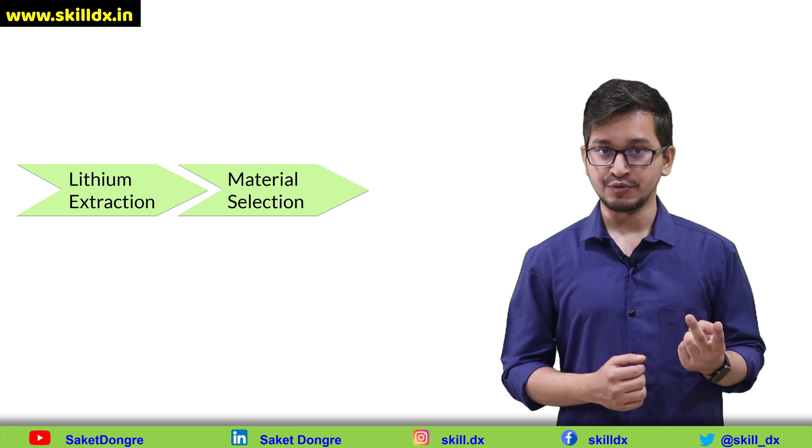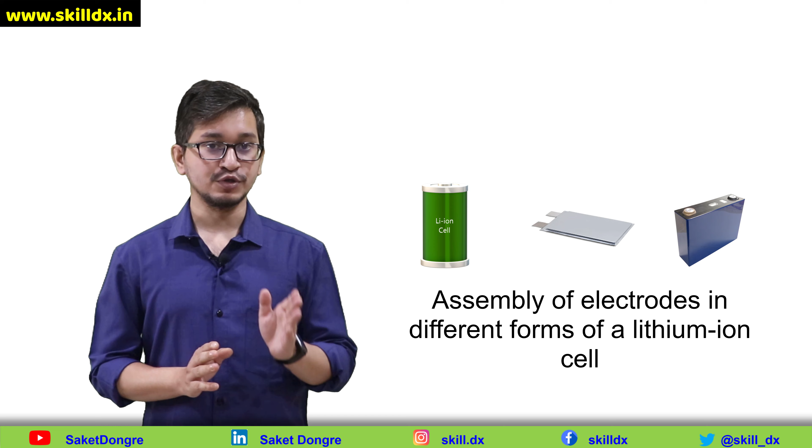Hello guys, until now in this series on lithium ion battery manufacturing, I have discussed everything step by step. It started from lithium extraction from lithium salt, then selection of materials for negative and positive electrodes, to selection of correct electrolytes and separators. Once we are done with all these, we fabricate the electrodes separately in different rooms under certain temperatures on one application machine. Now we move to the next process, which is assembly of electrodes in different forms of lithium ion cells. Let's get started.

The cell assembly process involves steps such as building the electrode sub-assembly, putting these sub-assemblies into a package, filling the cells with electrolyte, performing final operations to make sure the package is sealed, and lastly welding the container and inspecting the cells.

Some details vary depending on whether we are talking about building a prismatic, cylindrical, or pouch cell, but many details are fairly similar. This illustration shows the process as it would apply to a cylindrical cell or even to a prismatic cell.

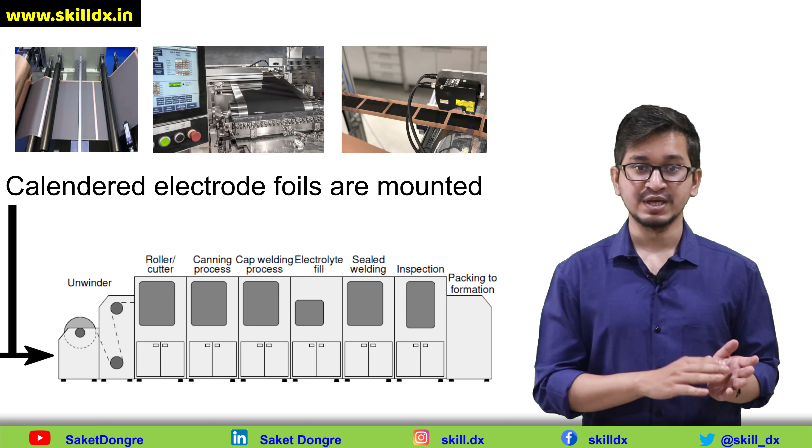In this drawing, the foils are already coated with the calendered electrode material produced from the previous steps, and these foils are mounted on the left side of the machine. The foils are then unwound from the large roll and passed into a machine that winds them into either the cylindrical jelly roll or prismatic shaped flattened jelly roll.

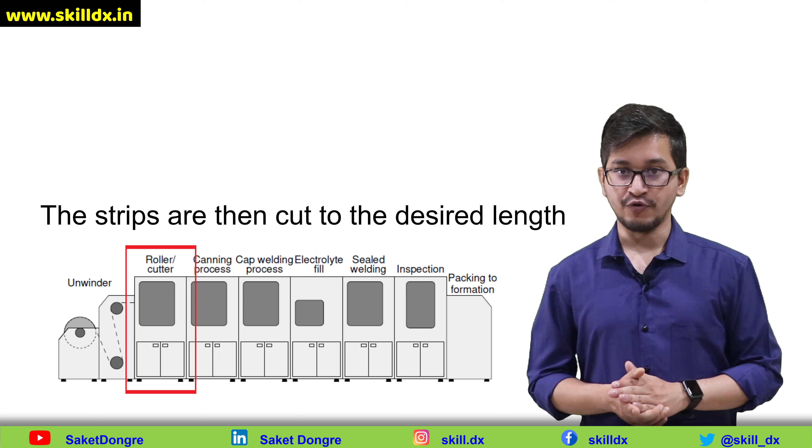The strips are then cut to the desired length to separate the jelly roll from the electrode foils coming into the machine, and the jelly rolls are placed inside empty metal cans, which are the containers for the cells. These metal cans are then welded closed except for a small opening.

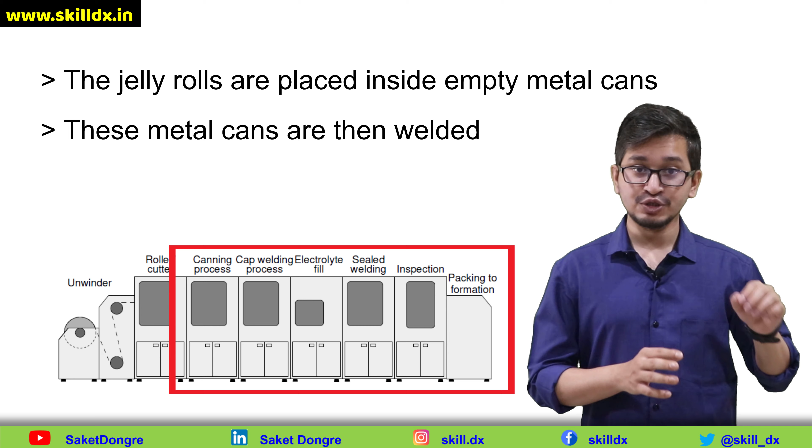The electrolyte is added into this opening, and then the final sealing of the cell packaging is done by welding. The cell is then inspected and the packaged cell is sent off to the next process in this assembly, which is a formation process.

Pouch cells are often used for high capacity battery applications because there is very little wasted space inside the packaging of the cell. Furthermore, the cells are rectangular themselves, so there is very little space wasted when we put multiple cells together to form a battery pack.

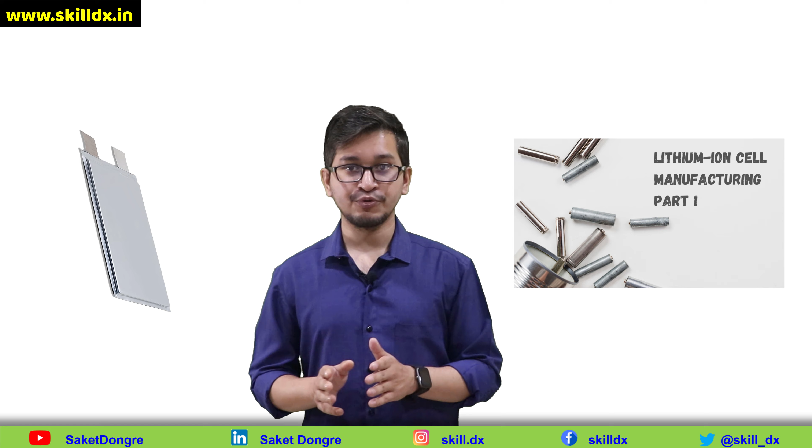Pouch design starts with electrodes fabricated in the way shown in the previous video, and then electrode structures are stamped out on these reels of electrode material in the shape of a rectangular structure with a tab coming out that will eventually be connected to the cell terminals. These individual electrode structures are stacked on top of each other as shown in this illustration.

Let's consider an example. We might start with a separator material and stack on top of that a positive electrode material, then a separator, then a negative electrode. The whole sub-assembly would be repeated multiple times so there would be many negative electrodes and many positive electrodes overall inside one pouch container.

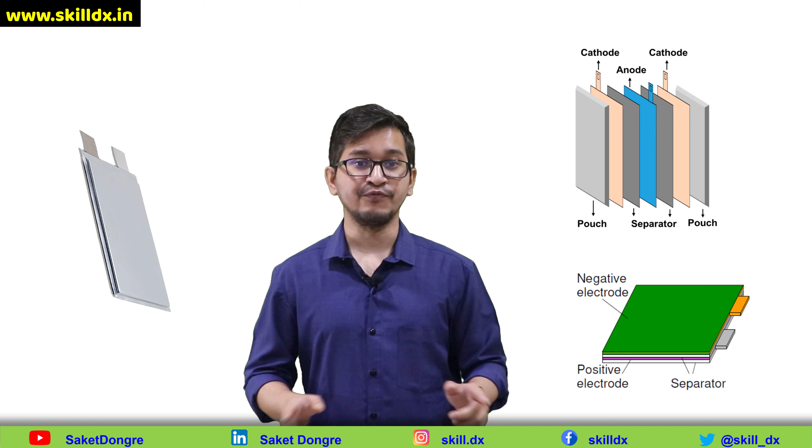The separator may be cut or stamped essentially the same size as the electrodes, probably a little larger, so there is extra space around the edge to make sure any shifting of the package does not result in a short circuit. Alternately, the separator could be wound in a zigzag shape between electrodes to ensure no possibility of short circuit if the electrode shifted in the package.

Notice in this diagram that the negative electrodes have their current collectors coming out of the tabs on one side of the drawing, the top right in this case, and the positive electrodes all have their current collectors coming out of the same place, but the bottom right of this drawing.

All of these individual negative electrode current collector tabs are welded together, and the positive electrode tabs are also welded together, making one large cell out of these individual small cells by effectively putting them in parallel electrically. So we have one virtual large negative electrode and one virtual large positive electrode that are the sums of these areas of the negative and positive electrodes themselves.

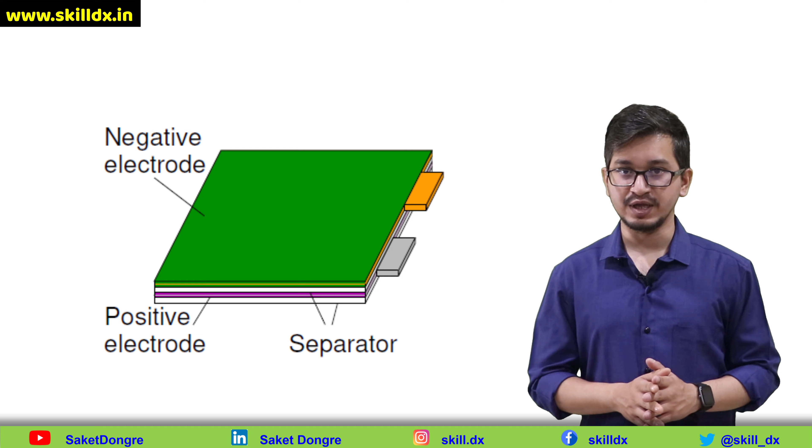And then these two welded current collector tabs are themselves welded to some kind of tab that extends outside of the cell packaging and forms the overall cell negative and positive terminals.

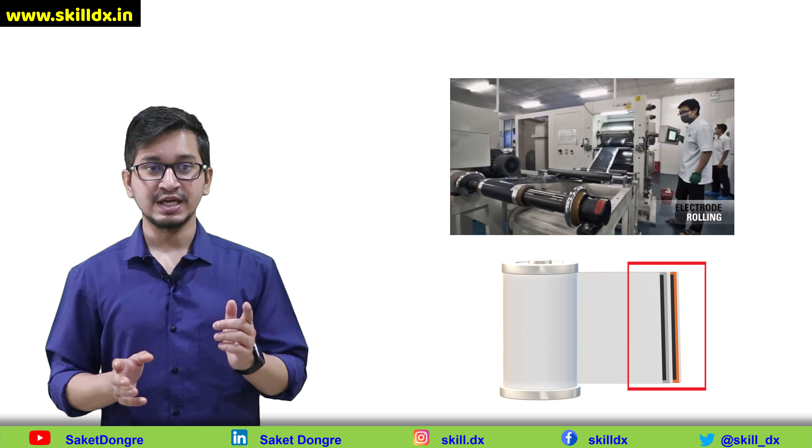Cylindrical and prismatic cells are formed in a different way. For cylindrical cells, the negative and positive electrode foils are cut into two quite long strips, and then one of the electrodes is placed on top of a separator, which is placed on another electrode, which is again placed on a separator, and this overall long sub-assembly is wound around a small diameter rod, a metal shaft.

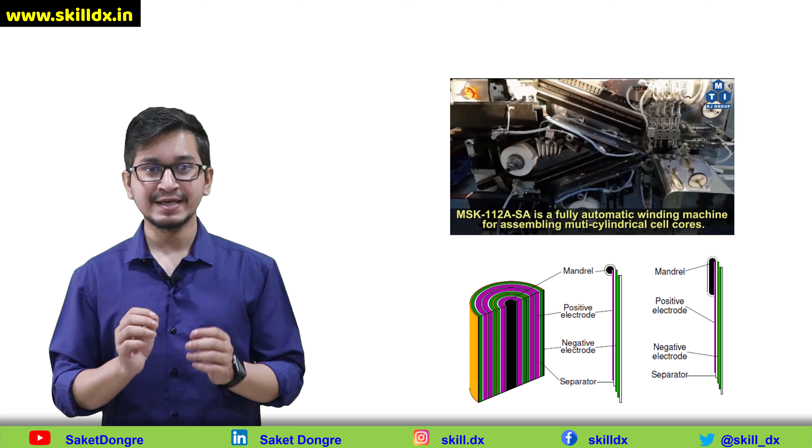The metal shaft is usually removed when the cell is packaged, leaving a really tiny cylindrical vacancy right in the center. The electrodes ultimately end up with the structure shown in this diagram, where a spiral forms from concentric layers of negative and positive, all separated by the separator materials.

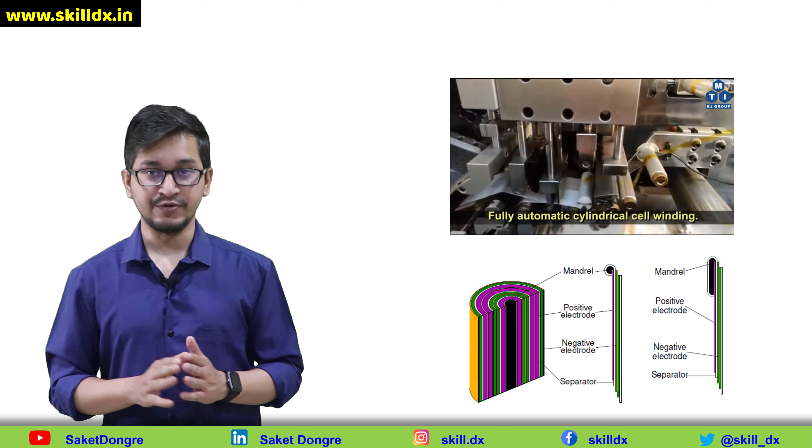The prismatic cells are constructed in a very similar way, but the winding is done around a thin flat mandrel instead of a cylindrical mandrel, which makes for an overall flatter package that's inserted into a prismatic can. So to connect to the outside world, these long cut current collectors have little tabs at different locations that come outside from them.

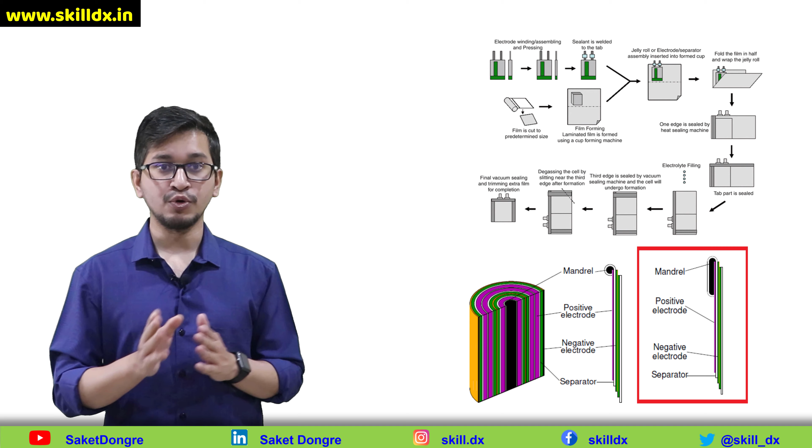One or more tabs from the positive electrode are welded to the positive terminal of the cell, and one or more tabs from the negative electrode are welded to the negative terminal of the cell. If the purpose is to construct a high power cell, there are often multiple tabs per electrode welded to external terminals in order to allow more current paths and therefore more uniform utilization of the electrodes.

In this step, we have assembled the electrodes for various cell forms. Yet we haven't discussed how to fill the electrolytes, and this I will be discussing in the next video. I hope you found this video useful and very informative.